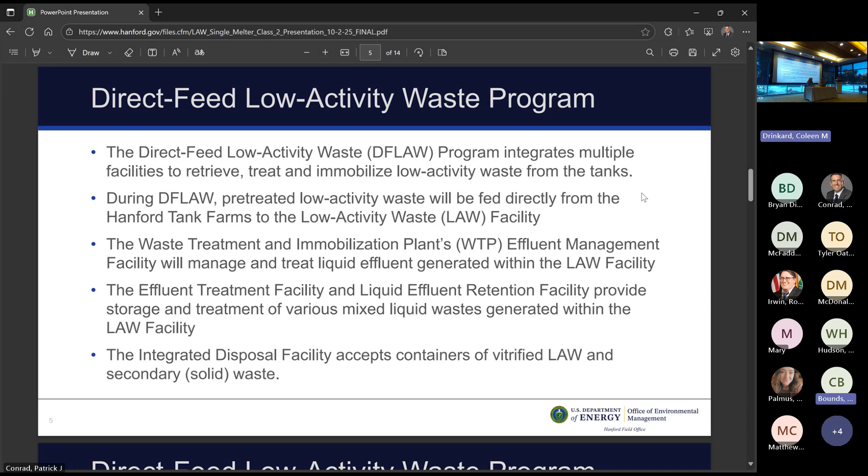The DFLAW program integrates multiple facilities to retrieve, treat, and immobilize low-activity waste from the tanks. It starts in tank farms where we have pre-treated low-activity waste staged in one of our double shell tanks. That material is fed to the low-activity waste facility. Glass formers are added. The mixture of glass formers and waste are then added to the melter, which is a melt pool at 2100 degrees. Then it's all mixed using bubblers and air and then poured into containers.

Each of those containers then is allowed to cool, and that waste is then put on a truck in an overpack and sent over to the integrated disposal facility. While we're making that glass, we also have an off-gas system that takes the impurities that come off of the glass. We have a multi-train off-gas system that will scrub those impurities, remove them from the off-gas so that out the stack we're actually putting out clean air that's also sampled.

That secondary cooling, because the components downstream of the melter don't like 2100 degrees, that secondary cooling water is provided to our effluent management facility. There it is treated with an evaporator, and the condensate goes down to our effluent treatment facility, and any of the things that are at the bottom get fed back into the glass. And then, as I mentioned, at the end of the day, those filled glass containers are provided to the integrated disposal facility, and that's where they are stored.

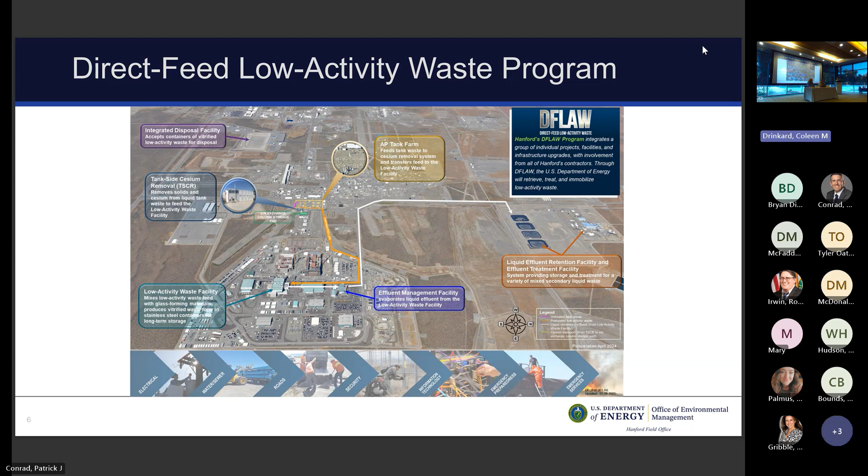So that just gives a pictorial view of an overhead of the facilities and the various interactions that have to occur to support the overall DFLAW program to vitrify the tank waste. The next slide is just showing an overhead of the entire Hanford site.

The waste treatment and immobilization plant is pretty much in the center of that graphic, and it's what we call the Central Plateau. So that's where our processing facilities were originally located and where the waste treatment plant is today.

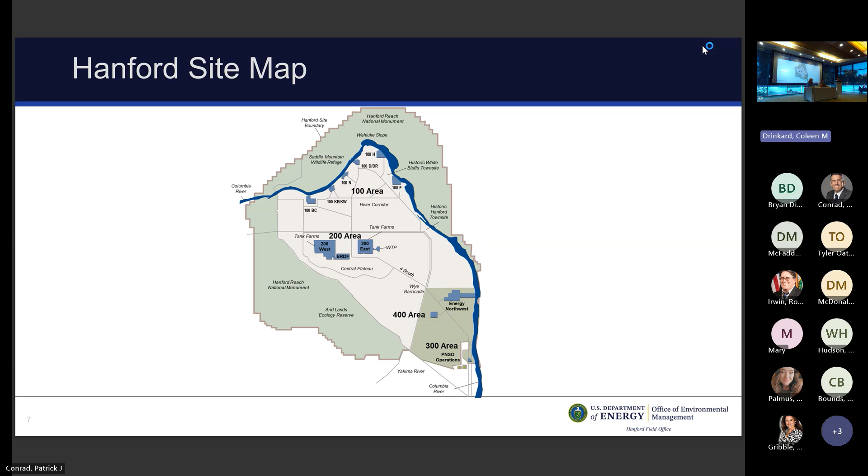All right, we'll switch to the next slide. This just gives a close-up overhead of the waste treatment and immobilization plant. The facilities we're talking about today are on the right side. The low-activity waste is in the bottom right-hand corner. The analytical lab also supports DFLAW.

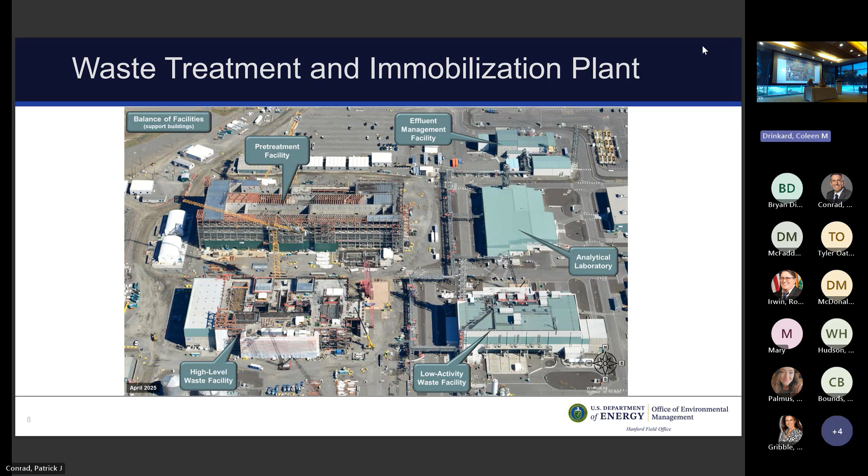That's where our process samples are evaluated to make sure that we're getting the right mixture of glass formers and tank waste that we then feed to the melter. And then in the upper right-hand corner is the effluent management facility. That's where our secondary liquid wastes are processed from LAW. All right, we can switch to the next slide.

Our regulatory framework. So this is from a big picture standpoint. The overall WTP facility is governed by the Resource Conservation and Recovery Act and is part of our dangerous waste permit, which is why we're here talking today. Washington State Department of Ecology has issued that permit, and they govern our overall permit and work with the Department of Energy and make sure that we meet all the requirements and that we're managing our waste properly. We work together on this modification.

This specific modification was originally written with the concept of running both melters at the same time. Both of the melters would be pushed to their operating capacities and run simultaneously. What we found though is to bring a melter up, you first have to add water to condition the top so that the top of the melt pool is a little bit cooler when that feed is added. And then you start to add the feed. That creates a cold cap. It's the impurities that form a little bit of a layer on the very top of the melter.

And then you get into a steady state where you're feeding, your pressures are all stable, your temperatures are all stable, and there's bubblers that keep that mixing. We've shown a lot of proficiency at running the melters by themselves. When we try to run both of them though, you have to bring one melter up, condition, that takes a couple of hours, feed the second melter, then run both melters at the same time. That challenges not so much the melters, but the downstream components. Those are the exhaust fans, the off-gas train, and all of the various treatment technologies.

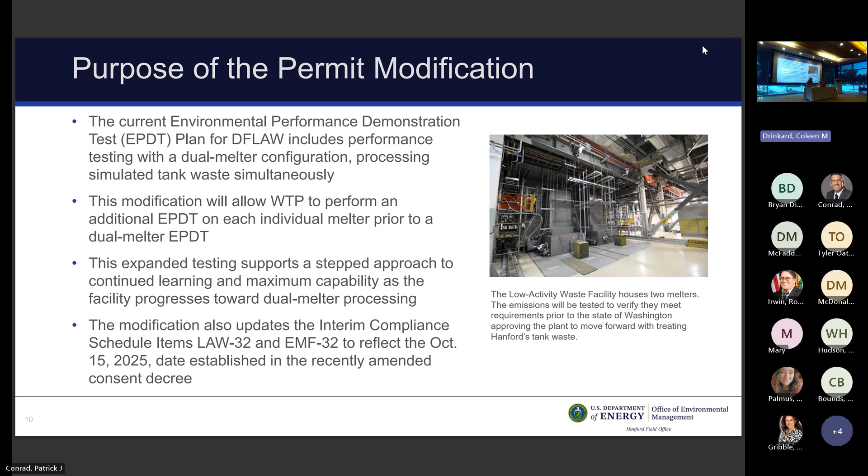And then, pardon? Okay, thank you.

And so then we also had to change the demonstration test plan that's in the permit to allow for all of those details. And in the meantime, when the Department of Energy submitted this Class 2 permit modification request to us, which we worked together on, they also requested a temporary authorization to be able to proceed forward with the work. And so the Department of Ecology granted that temporary authorization to allow them to keep going on the testing while we were going through the process of finalizing the permit.

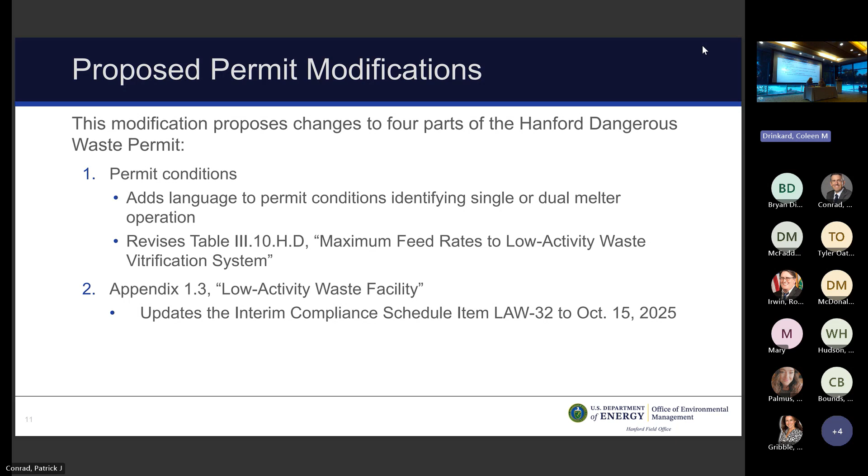All right, so I think we're at the point we can hand it back for logistics and then questions. Yes, if we can go to the next slide, please. Our comment period is open through November 1st. You can send it to us electronically. That's preferred, but we'll take the comments any way you'd like to send them. You're very welcome to type them up and mail them if you'd like. Please send them to Daina McFadden with the Washington State Department of Ecology, 3100 Port of Benton Boulevard in Richland, Washington, 99354. Thank you both, Matt and Suzanne, for your excellent explanation.

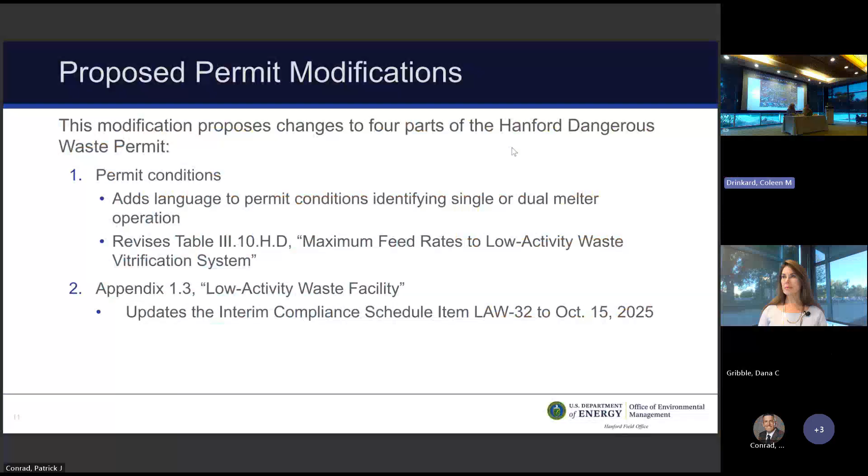I see we're getting us set up here. Yep, that one. So that goldenrod line that starts at AP 106 in the center of the picture, and then it goes to the east, which is down. I know that's not normal on a diagram. And then it turns south at the effluent management facility. The reason that's significant, I'll give you a little extra trivia.

That 90-degree turn is the low point, and that low point is specifically designed so that if we ever lose pumping capability, it all collects in a known location. And then we're able to distribute it either back to the low activity waste facility or back to the tank farms if we have to. So that's what it is. It's an underground pipe.

All right, and then it looks like there is a follow-up question from Liz. Does the waste start getting pumped through the pipe on the 15th or earlier? Will that be the first use of the pipe system? And how did that system get tested? So that system has received water piped through it. In the past, it's also had hydro testing to make sure that it's leak tight. We have not made waste transfer, so it will be the first waste transfer on that particular pipe.

That waste transfer will occur in advance of both the consent decree and obviously feeding the melter. So as I stated in my earlier statement, that is imminent and will be happening at some point here this week once all of our steps are confirmed. Very exciting. We have another question from Mark. He said, not fully related, but are there ongoing plans to safely ship secondary debris LAW for off-site treatment?